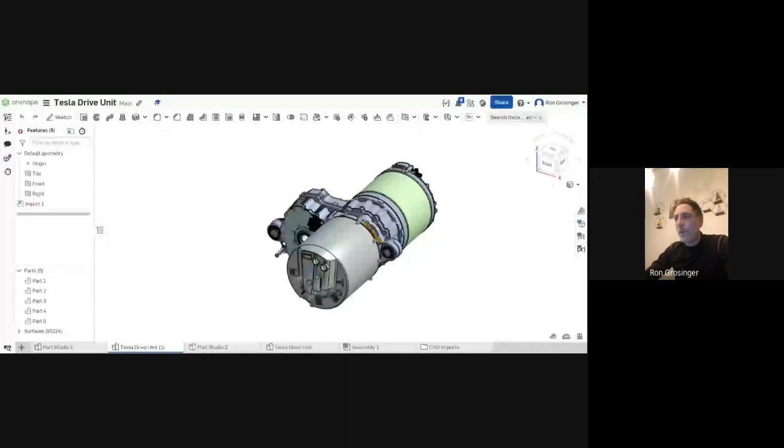We just exchange ideas. An idea we came across tonight was: can you get the CAD file of a Tesla drive unit? And if you do, can you 3D print it? Or can you get it made in foam, and then test fit your Tesla drive unit into the frame rails to see if it fits.

So we did a little experiment with the help of Richard from the EV Riders and Kevin, and we downloaded a Tesla drive unit. So Richard, what project are you going to use this for?

Well, it's all super secret sauce, but a small sports car, maybe something like a European Miata. We're looking to replace the rear differential with a Tesla drive unit, and it may be too big to fit, so we may have to cut the rails. It's a vehicle with independent rear suspension and a differential, with a drive shaft.

And the idea would be to get rid of the differential, put the Tesla drive unit in there, make custom drive shafts up. So the question is, will the drive unit fit inside that? That's the area everybody is thinking of doing this in, I guess.

You should know that last week on my other podcast, the Shop Class podcast, we interviewed Brandon from Amp Revolt, which is in Lancaster, Pennsylvania. He has a drive unit modification they sell you. They lock one side of the differential, and they sell you the drive shaft adapter, the yoke, and you turn the drive unit 90 degrees and go longitudinal. So that's one option - you use the space for the motor and transmission, which is more space, and leave the rear suspension all original.

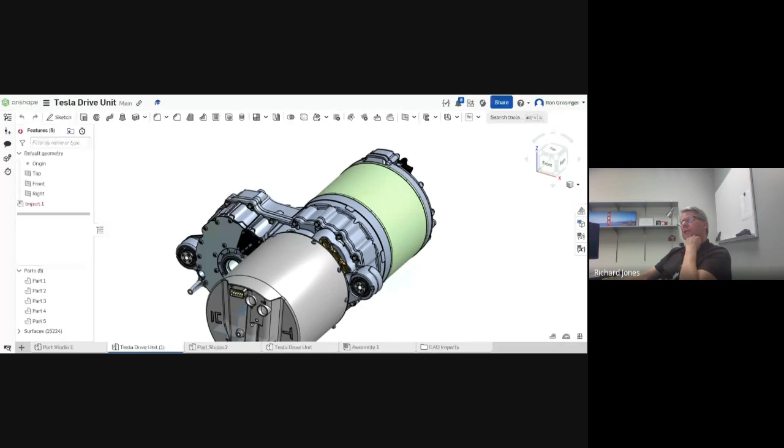Yeah, that's interesting. He's a really good dude, he taught with me for a while, so he's pretty knowledgeable. Here it is, I could show you what it looks like. It's an option, and the whole interview's on the Shop Class podcast.

Let's see, motor accessories - his website doesn't go straight to it, so he sells you this thing here. I think this is the drive shaft adapter kit, and I think he's got a video. Yeah, he's got a video. There you go, I don't know if you can see that.

It's underneath the vehicle, and this is really for heavy duty stuff, like if you have a really heavy duty 4-wheel drive, or a rear wheel drive with a large differential live axle, and you don't want to change it because you want to keep the integrity of that robust setup, like a delivery truck or something. Not that the drive unit can't do it, but you'd have to build some sort of suspension system for the half shafts. In this case, you don't have to change anything, so it's an option.

The advantage to what Richard's trying to do is take this thing, use the built-in differential - there's no additional losses - and take all the front space of this car, which is pretty small, and put batteries up there instead. Use where the engine and transmission is and stuff it with batteries, and use this Tesla drive unit, which has a differential built into it, in the back. But this is a way to go too, in the case where you want to preserve the original drivetrain - a good reason for that is 4-wheel drive, because then you put this right into the transfer case and you've maintained your 4-wheel drive.

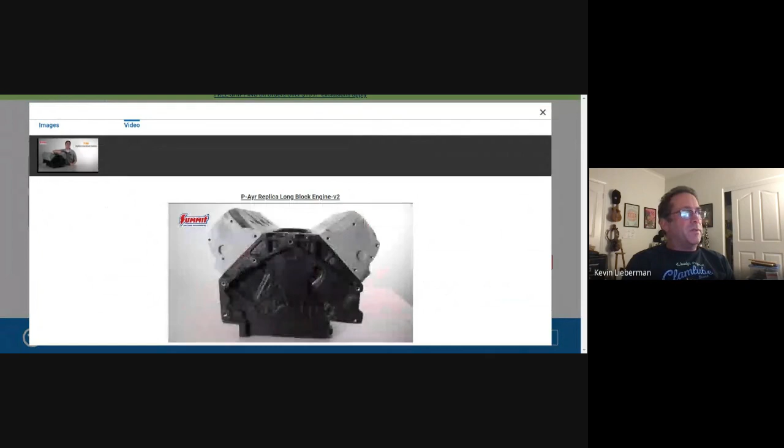Because when you're trying to fit these in a car and see if you have enough space, you're off by an inch or two. You're trying to route exhaust pipes and things like that. It's way easier to do with a 20-pound plastic engine than a 600-pound iron engine. You got to keep pulling this thing in and out to clear the frame members, and route exhaust way easier with something light and easy. Same deal with the EV stuff.

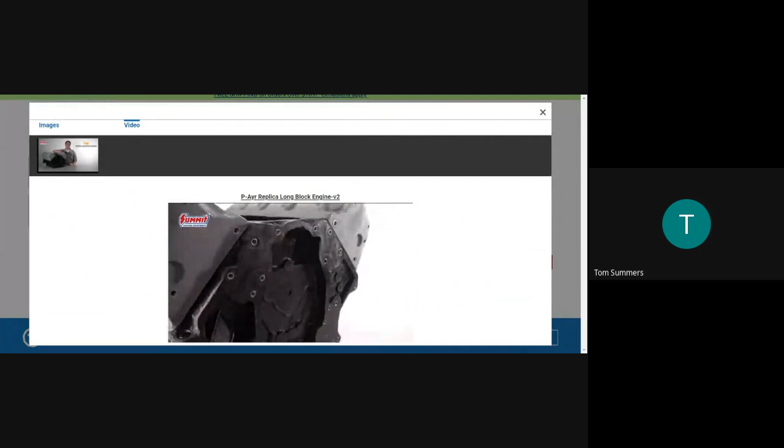Gentlemen, yeah, go ahead. We could do this with two-part foam. Have you guys ever worked with two-part foam? Make a mold. We could make a mold at EV West with their Tesla Model 3 drive unit, and then cast our own foam model.

Perfect, that stuff is easy to work with. Making the mold is going to be a little tricky, but you can use vacuum forming. Is that what it's called? Oh yeah, vacuum forming would be pretty good to make the mold. Just make it in halves. They do it in halves. You just make up a little box.

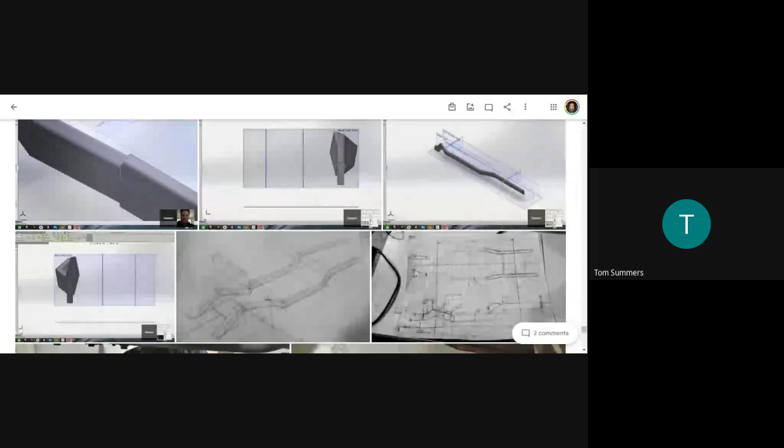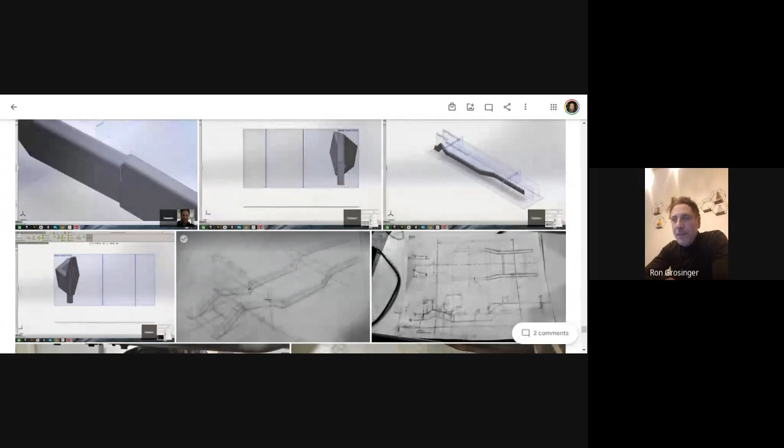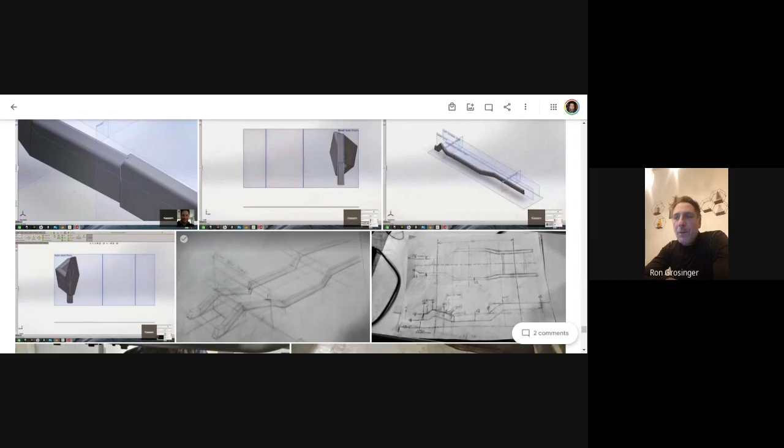Yeah, I agree. And maybe that could be done at the EVLC as a project layout class—like how do you size the parts for your project. That would be a pretty good class, because that goes into metal fabrication, engineering, and mechanics. And Sarah's not that far—she's in California, and Kevin's close by, and so is Talik, and so is Richard. Maybe this is something we could do. And Tom, if you know how to do it, we could all work together.

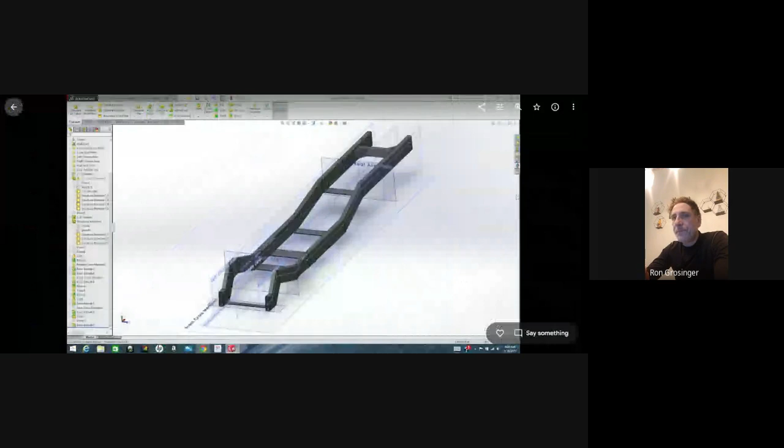Here's an example that I had to deal with when I was working on a Chevy K2500. What we did was we mocked it up in CAD, just like what you're talking about. This is the kids mocking it up. This one's not quite right, but the drawing is there with all the measurements. We had to take our measurements.

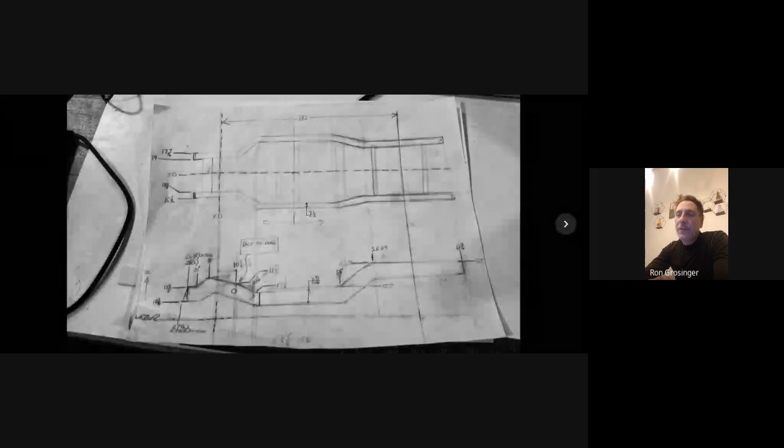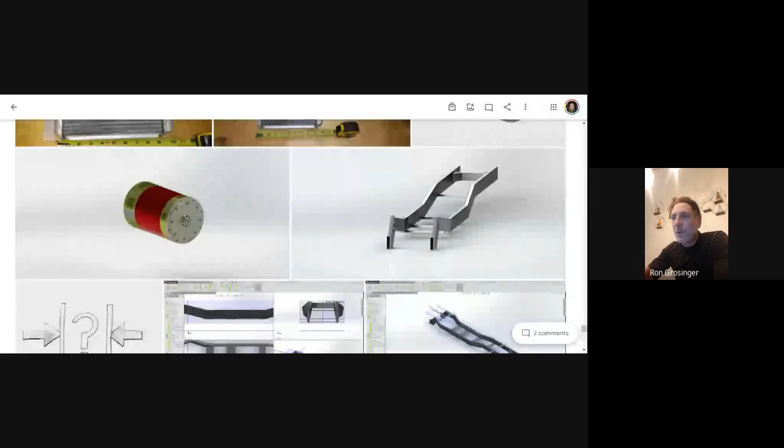And so yeah, like the fitting, the layout—some people call this engineering packaging. Like, where are you going to put everything, basically. It's not easy. And that's not something we cover in EV 101. That would be really good, actually. So I agree with that. That's a pretty cool one. And then it's a place where a lot of people get stuck—you bought the parts, now you're trying to fit them in your little car. How do you do it?

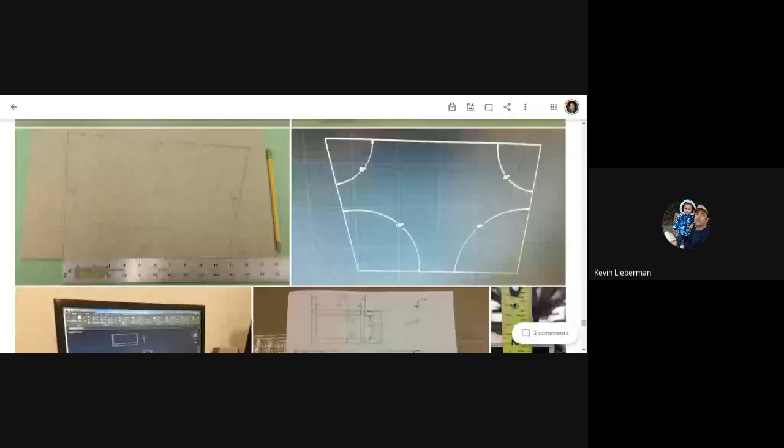And you get tired of pulling motors in and out trying to fit things in. I'm getting tired of pulling batteries in and out. Same thing could be done with batteries—these batteries are big and heavy and bulky, and I'm trying to get them to fit in my frame. Polystyrene models would be cool.

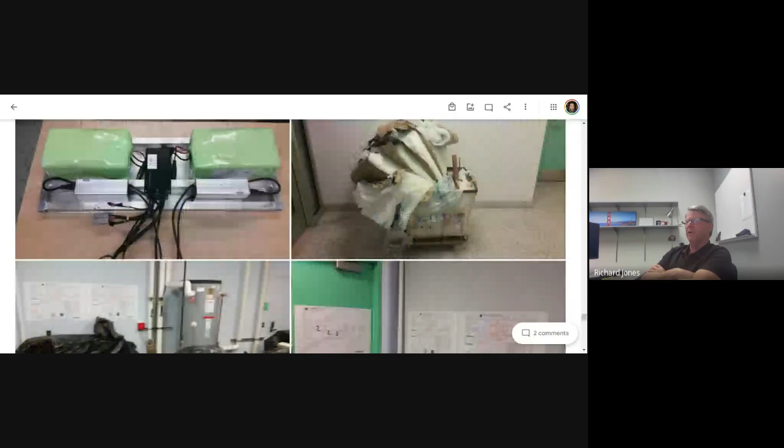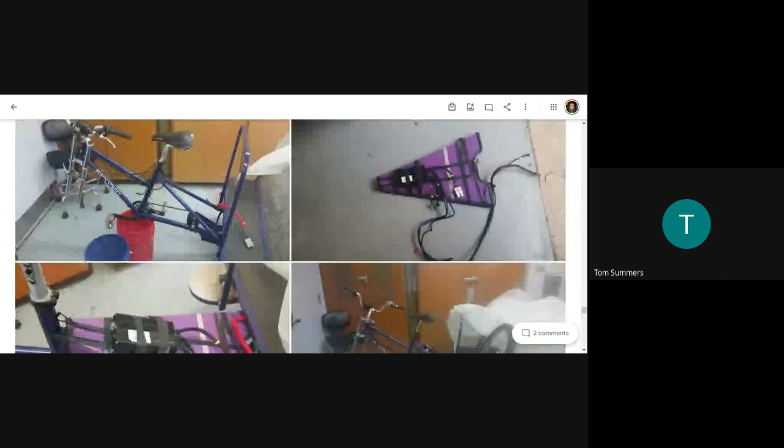Yeah, we do that a lot on boats, we make mock-ups. And by the way, Victron had those battery dummies we talked about last week. They have dummies, oh that's right, they had. Yeah of course, because they're heavy, so they had mock-ups for you. And this is very common in the boat world.

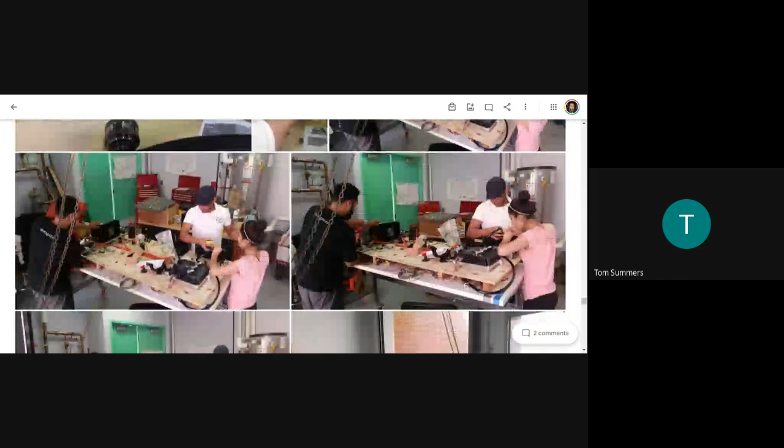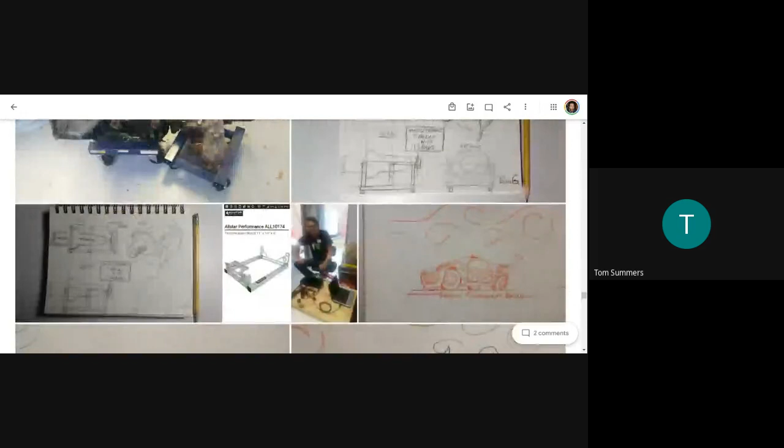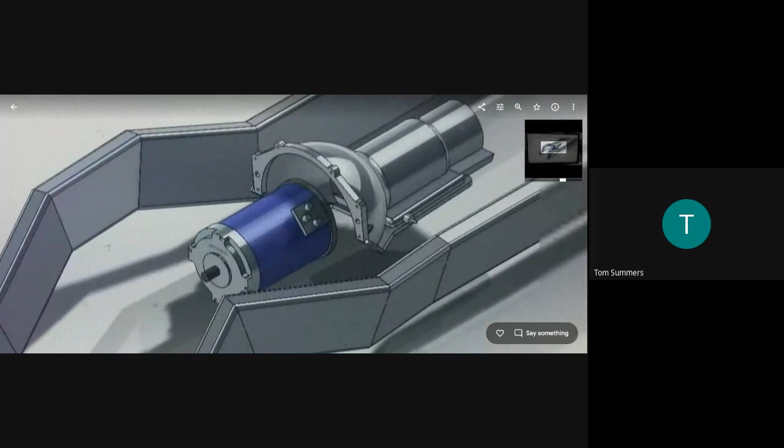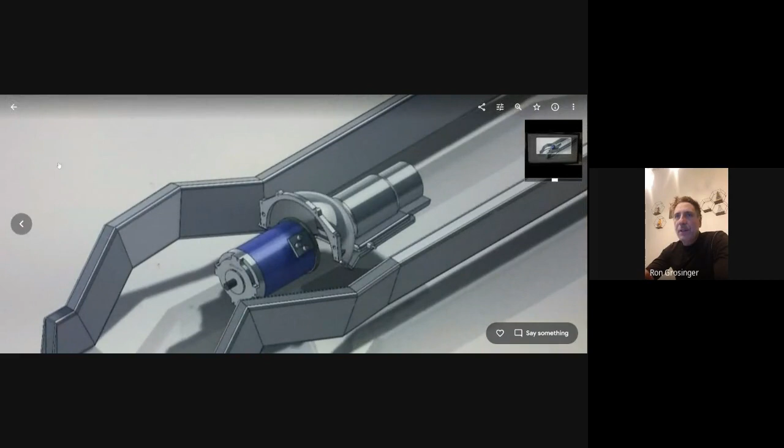It's the same thing with automobiles—nothing is plumb and square. You've got all these weird shapes, and you got to make some cardboard mock-ups with Scotch tape and scissors and all that good stuff, just to fit stuff into compound curve shapes. So mocking up is something we do a lot of. I agree, and then showing some in basic CAD, but also hands-on skills—so you might not always have access to CAD or want to work in CAD, so you might want to mock it up just in cardboard.

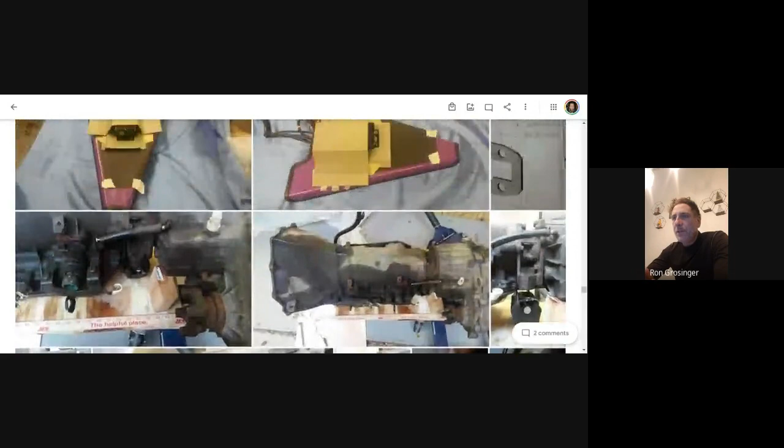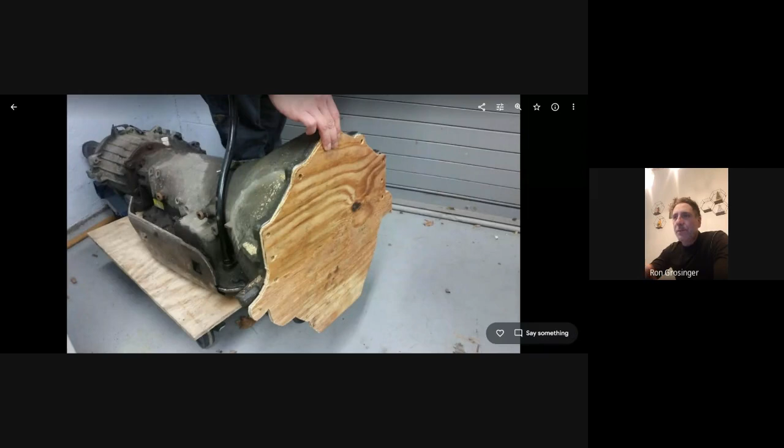I'm looking through my photos for a mock-up engine. Pretty cool topic. Even the adapter plate, if you don't have one, you can just mock it up in plywood if you had to.

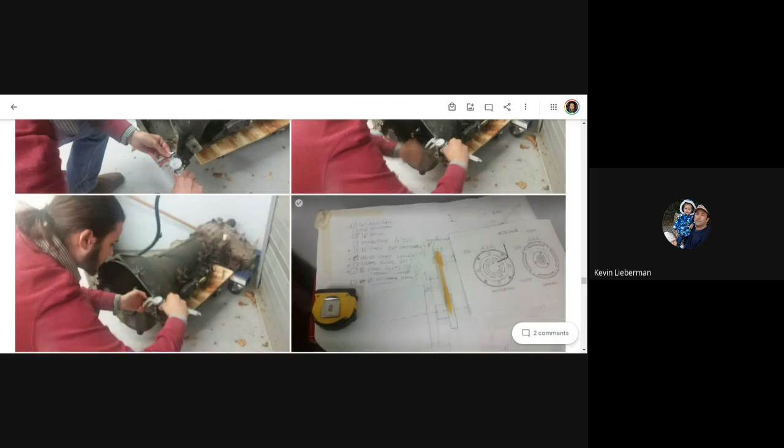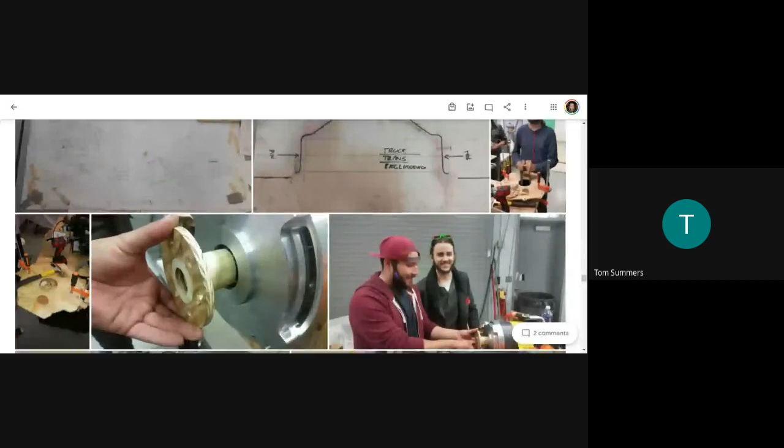And then there's services like Send Cut Send, where you send them the CAD model and they send you back the thing made out of metal, exact, with all the holes drilled. And don't forget, we have that machine at Michael's that does the bell housings and sends out the PDF file for it to be turned out on a lathe or whatever. So we're already doing this.

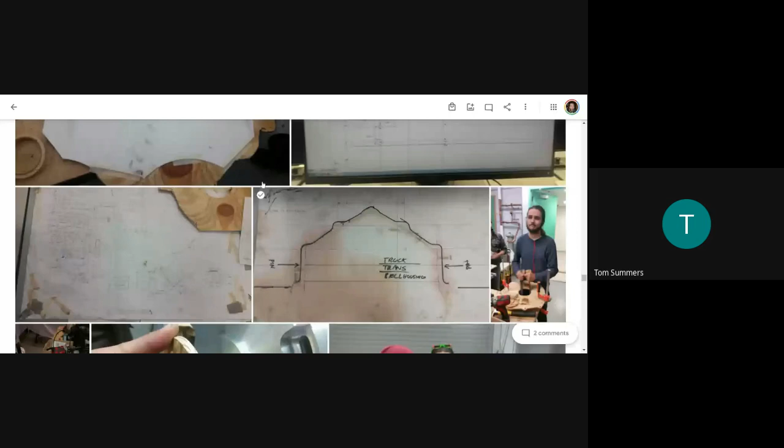Yeah, we just don't serve the mock-up side of it. If your company, they go straight to the end product.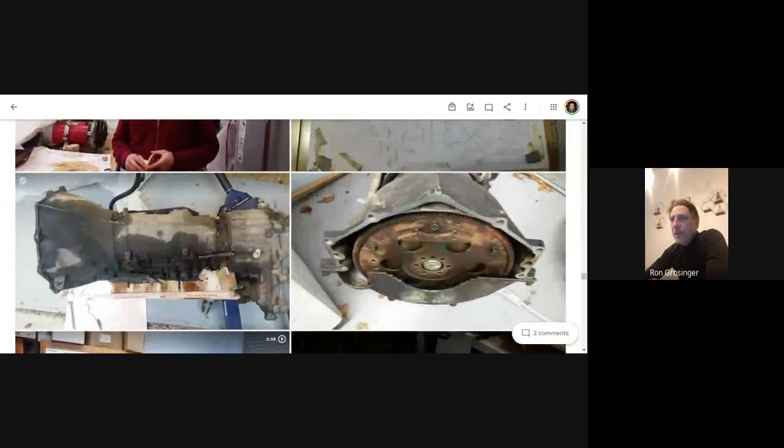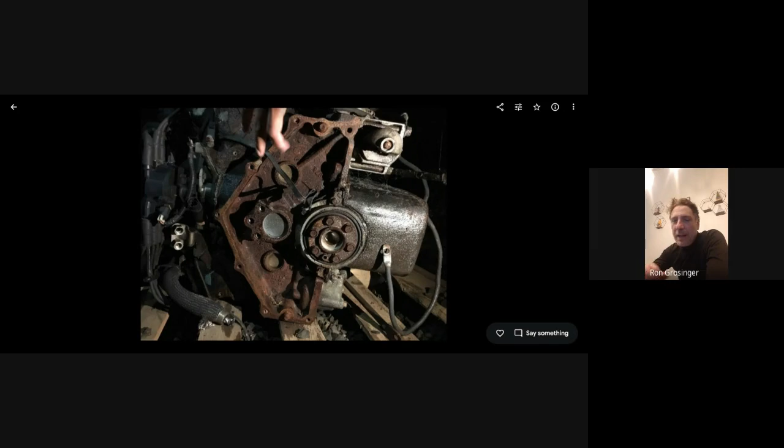Actually, I'll tell you something funny. Clearly you're going to buy a coupler if you had, let's say, the Net Gain or AC50, but believe it or not, one of my students came up with an idea. Do you guys see this photo? This is a very important photo. This is the end of the engine, the back by the transmission, where the transmission meets up. Notice something - that looks like the end of a coupler.

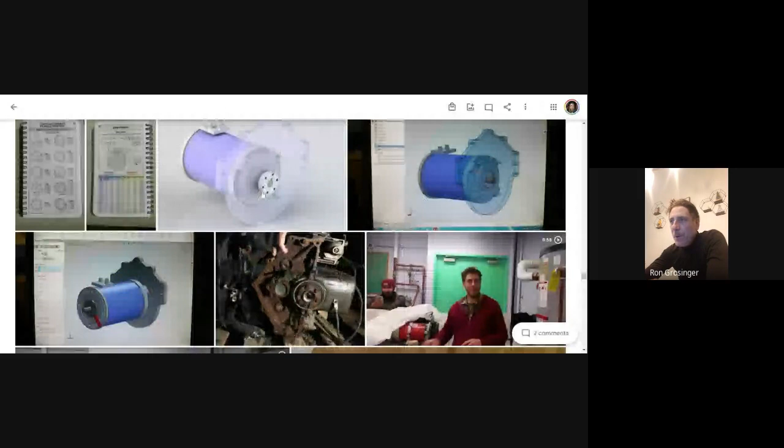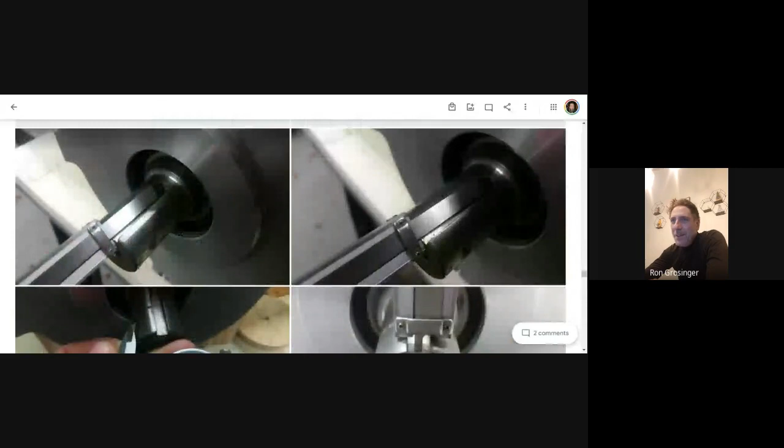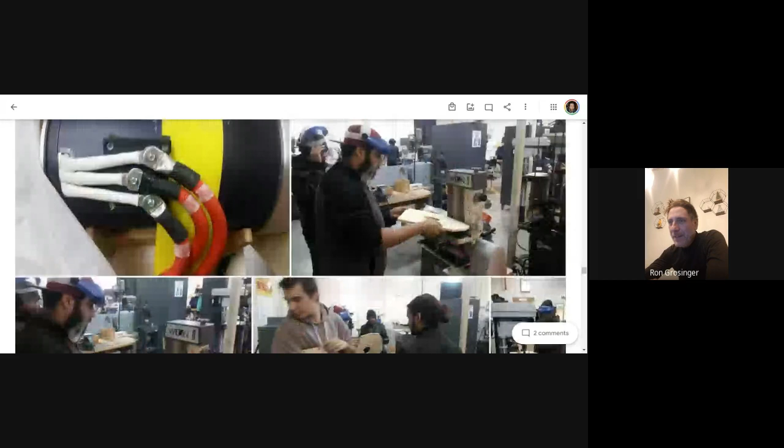What we realize is all you have to do is take the drive shaft out of the engine and cut off the end of the crankshaft. I'm going to show you a photo of that. The end of the crankshaft is a coupler. All you got to do is put it on a lathe. Here's the mock-up in a 3D printed example.

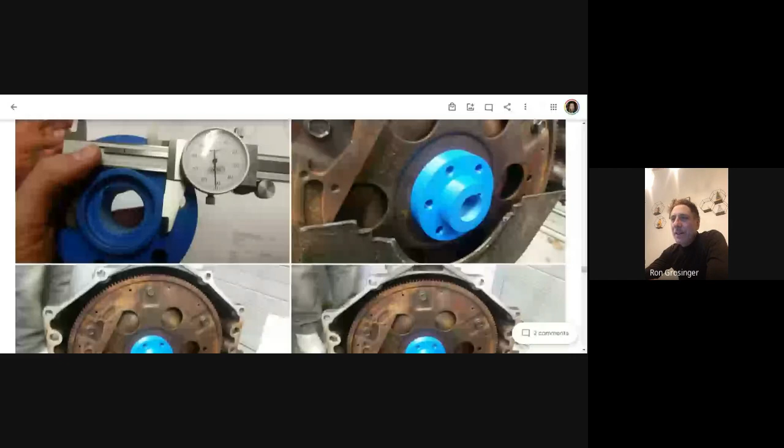And I couldn't believe it, but of course you're going to buy the coupler, right? Because Canadian Electric Vehicle, they have them available, but here's like a mock-up of our 3D printed one, and that's not going to last, obviously. But we then went and cut the end off the crankshaft. It's a bit extreme, but the idea is you have all the resources you need on the old vehicle - that's got a lot of dimensions. You might want to take note of those dimensions before you tear apart the car and stuff like that.

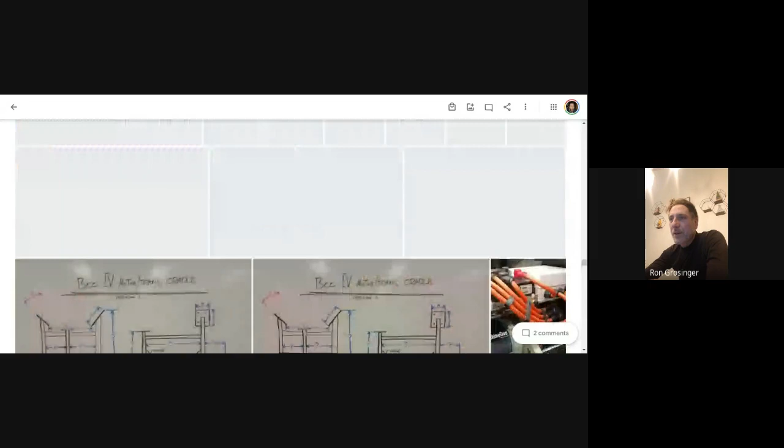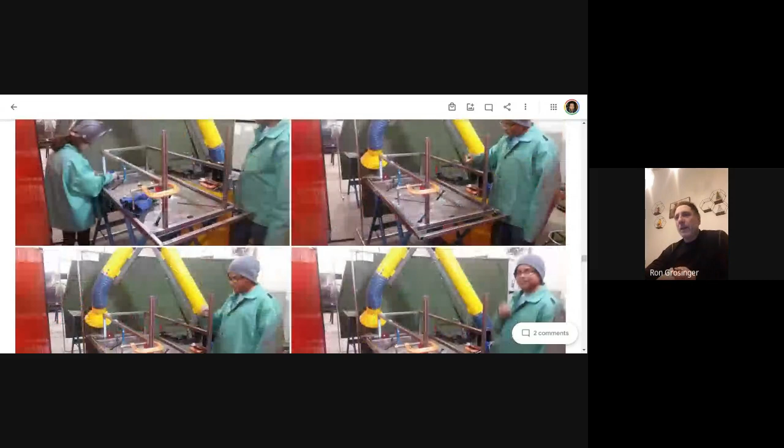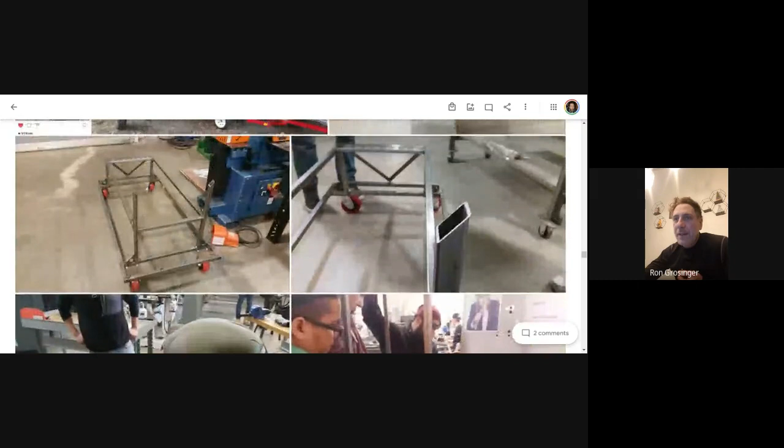So these are some of the things we come across when doing these mock-ups. Actually, we got crazy - we were at a college and didn't have time. If you're working in 2 locations at once, we made an engine stand for the whole thing. So this was our CAD drawing, but we put the motor and the trans on a stand because the truck was not available at the time.

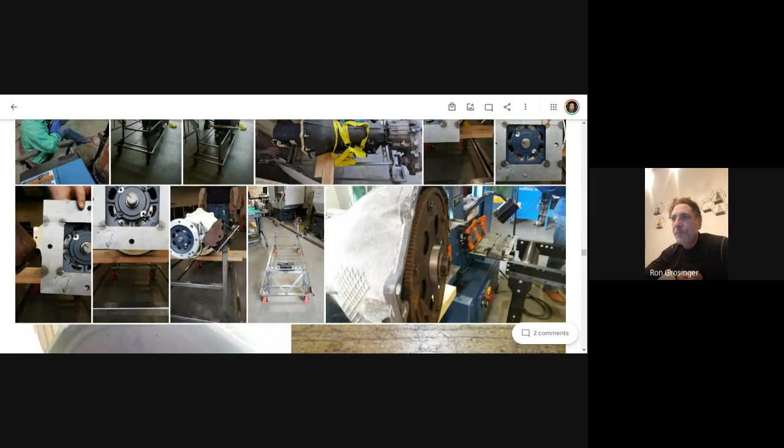And so that's an option.

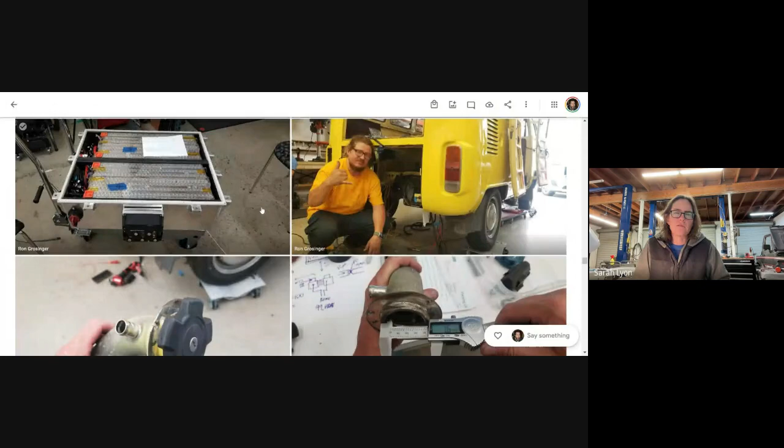Luckily, I have all these. I've done all this on the bench. None of it's in the car.

Would you like to see? Sure, you're about to see our delta here. We had quite the spread on it. I'm trying to find the video, Tollak. Do you know where the video is? Because it shows us charging and then the BMS shut it off. Kevin had a video. Oh yeah, that's right, he has it on his channel. Yeah, I don't know if it's unlisted, but he put that on YouTube to send to the class the next day. Okay, I'm gonna try and find it.

Oh, Kevin's huge resistor, is that what you're talking about? Well, there's two different things going on. Yes, there is a resistor setup, I think Richard's talking about, that's at the EVLC now. Maybe they have two of them, but that's for discharging. And you should not do this without the BMS hooked up, so just keep that thing connected.

But what we did was we charged in the summer because we were having issues where the voltage was strange. There was a runaway a little bit, and the voltages were creeping apart from each other. And then when we went to charge, the BMS shut it down within a minute. So then when we went to go look at these cells, nothing looked damaged. But that's the scary part.

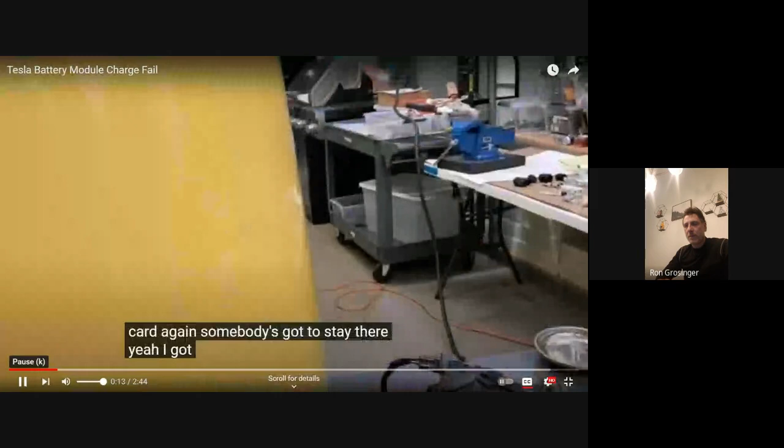Now we're going to turn the charger back on. This is happening at higher currents. Specifically, you slapped it? I'll wait till you get in, right? No, slap it. What's wrong with me? And that's just setting up the charger on the wall. But here we're going to get to the PuTTY terminal in a minute here. Get in the bottom first. Okay, not happening, you need to push it in.

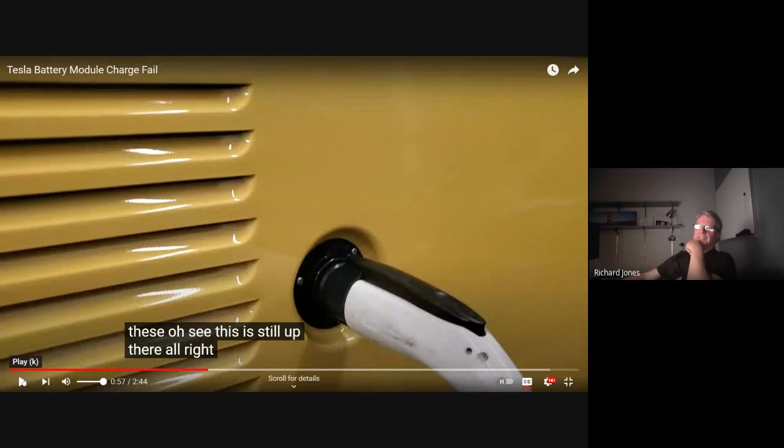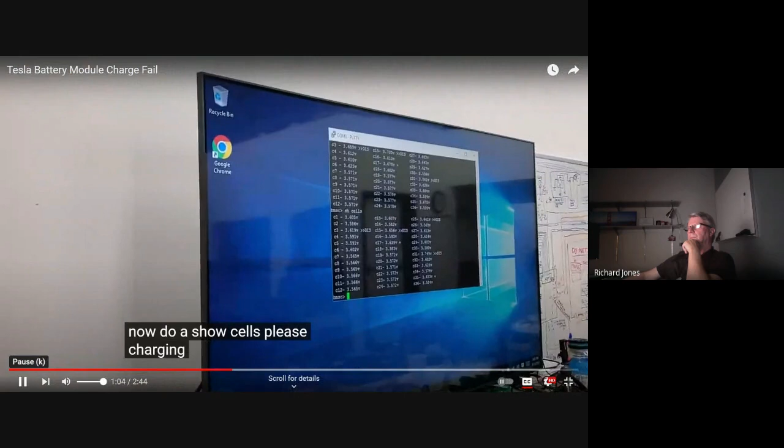Now it says cell 30. Okay, cell 31, 3.75. You guys see that? That's bad news, look at all the other cells. Are these really bad cells? These are LiPo, right? Not. This is a Tesla module, and they were bad. These are Model S 18650s. Model S, yep. So fully charged they are 4.2 or 4.1, right?

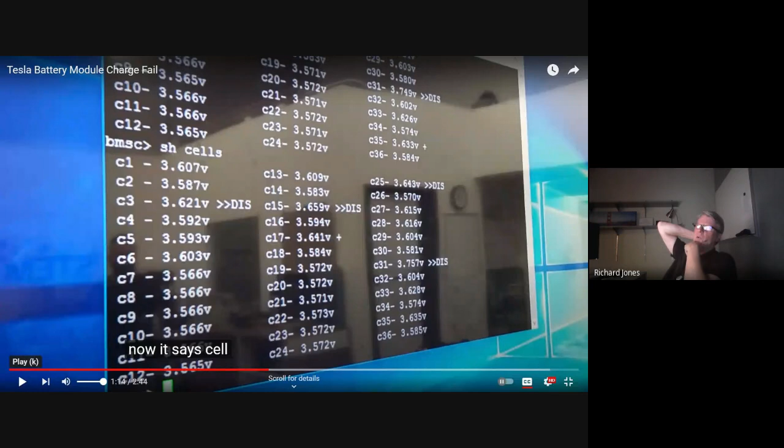No, you didn't finish charging them. I'm just showing you how fast this happens. Watch the refresh, it's going to be at like 3.8, 3.9, boom, and then it shuts off the charger. So here we go, all the rest of them stay kind of nominal.

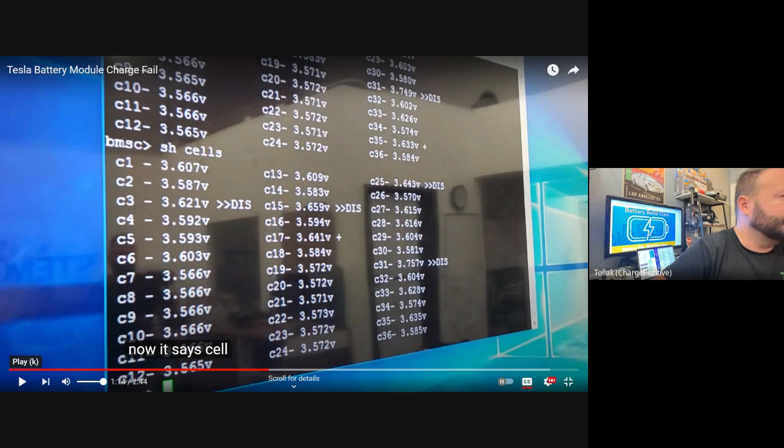So that cell 31, that could be a bad cell, or it could just be a cell that is being discharged. Do it show again please. What's that? That could be a bad cell, most likely, but it could also just be that the cell was discharged separately to all the others, and so it's getting close to being full before all the others do. See what I mean?

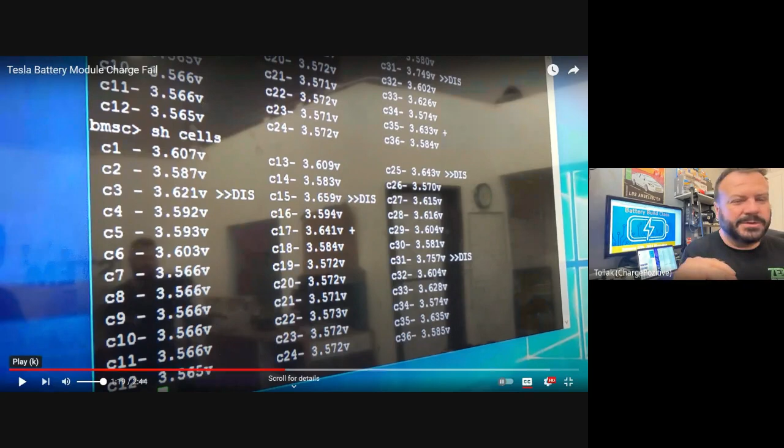Discharged? I mean, it went from 3.6 all the way up to 4.2 in a half a minute. Yeah, they started in a similar voltage range, but then it accelerated faster than the other ones.

Yeah, well, in this case that probably is a bad cell. It's basically showing that it's full before all the others were. And if it was exposed to the same energy draw, and it's being charged and discharged with everybody else, and suddenly it's behaving differently, well then that's a bad cell. But in Sarah's case, we haven't got a characterized pack yet. We've just got these modules that all came out of the same car.

After charging them, you have one cell that causes the charger to stop. That's always the case, and they're all looking about the same. So really the thing to do is to actually do a capacity check to characterize what kind of pack you have.

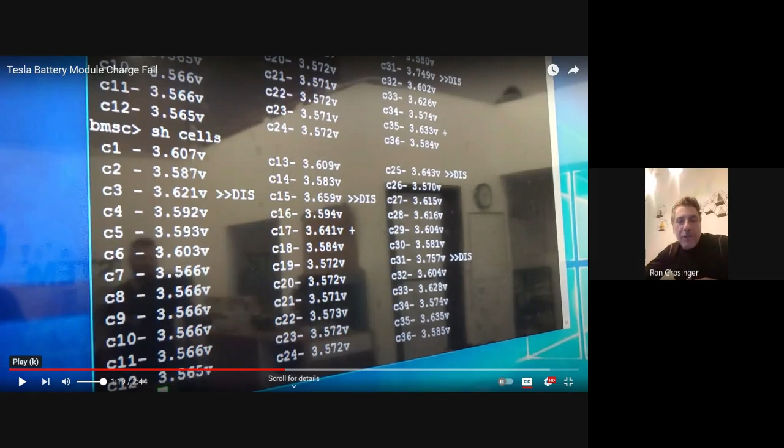100%, Richard, you're 100% right. I was just showing Sarah a nightmare scenario going from around 3.6 all the way to 4.2, shutting off the charger in a half a minute. And we already installed the pack in the truck. And this was also after trying to trickle charge, this was like after trying to set it on the BMS overnight, right? This was after...

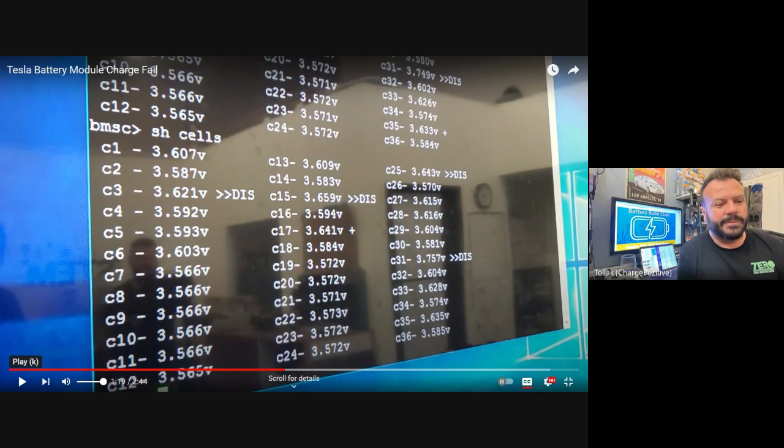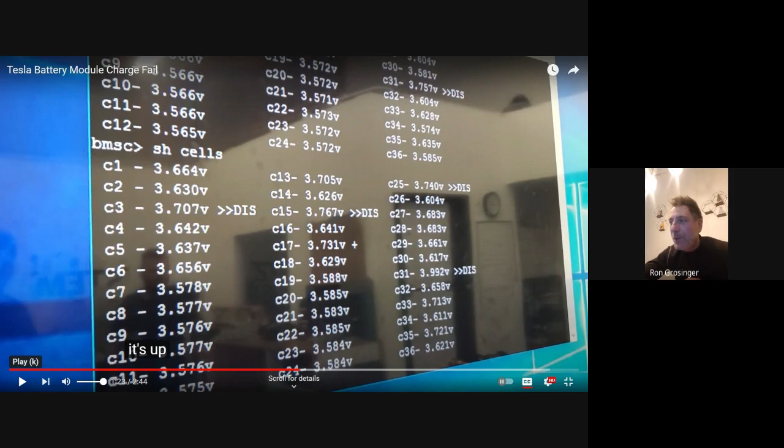...balancing it in parallel on the bench and then trickle charging it to get closer over a couple of days. This was after a lot of work, in and out, swapping, you know. So here, watch this happen, ready, here we go. It's up to... there, look at the refresh. I don't know if you could see that. That cell 31 is up to 3.99, 3.992, and the rest of the cells are in the 3.6, 3.7 area, and some at 3.5.

Now, had you characterized this pack before you did all this, or is this the first time you're really trying to work it? That's the magic question right there for Sarah. Yeah, honestly, this is what I advise people: you get a set from a supplier, they really should be stress tested. I think voltage is not an indication of the health of the pack.

Would you agree with that, Richard? No, for sure, that's a rough indication of how charged you are. You're either in the no man's land, you know, between 20% and 80%. It's only when it's starting to go up or it's starting to go down that you know that you're nearly full or you're nearly empty. But if this pack started with everybody nearly full, and then you drove it around a little while, and then you went to charge it up again, and this cell's behaving like that, that's clearly a bad cell.

Right, if you hadn't taken them all the way down. This is how we received them. Yeah, also we didn't have the time with the project to try to take apart the module and test each...

You have to basically treat a module as the replaceable unit. But individual cells within a module can be bad, right? Especially if it's come from a wrecked car or you don't know what's happened to it. But yeah, if you find a bad cell in a module, there's not much you can do about it other than replace the entire module. Right, because they're kind of like glued in.

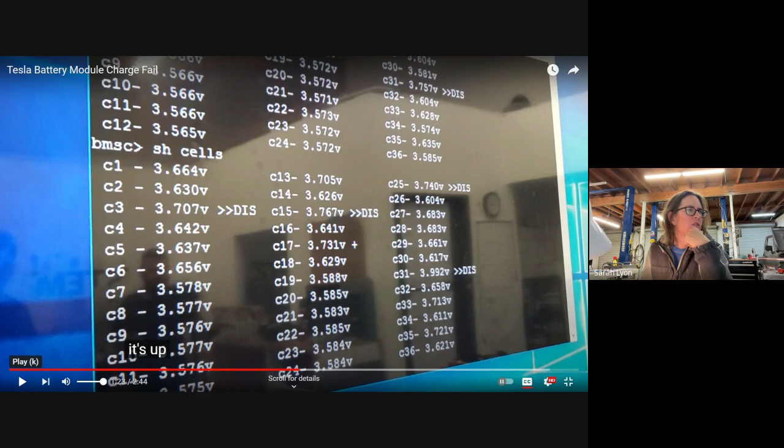Yeah, I wish I could show you my screenshot of the history, because it shows the watt hours and the voltage and the current. Just to reiterate what Richard's saying, I'm not saying you have a bad module. I'm just showing you what happened to us last summer.

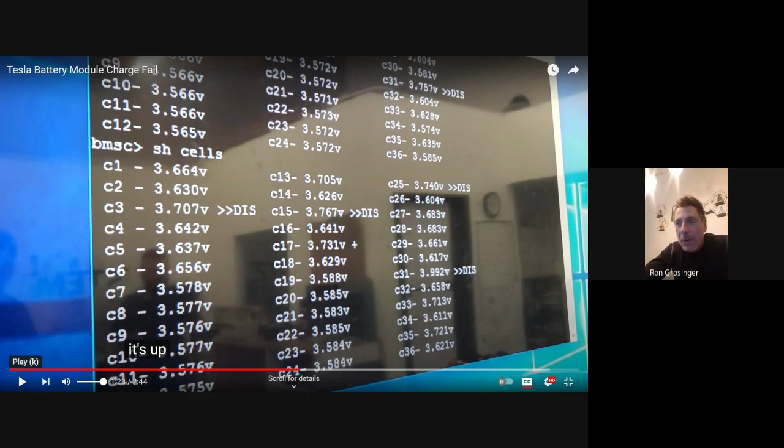And I learned my lesson that you really do need to know the capacity, or at least discharge it partially or charge it a bit and just see how they act. Voltage is not going to be a good indicator. And if you watch the last 30 seconds of this video, you'll see it rises up to 4.2 and shuts off the charger. So here we go.

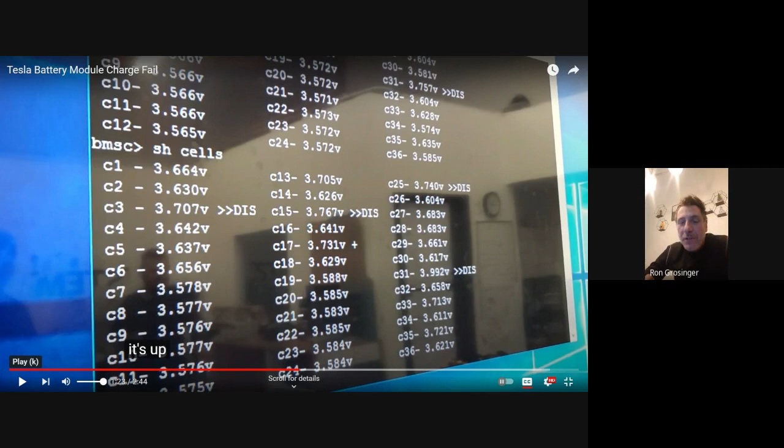So the only way to... 3.992. Oh, go ahead, sorry. To refresh it, it won't show it in real time. Is there no way to show it continuously? No, you have to refresh it. I forget the command, Richard probably knows it. Yeah, with that screen, you have to keep typing it in.

Or you may be able to get your terminal server, whether it's PuTTY or something like that, to repeatedly send the show cells command if you're using that screen. But if you do what Kevin's done and you've got some coding chops and a CAN bus, like Kevin is constantly reading these cell voltages and displaying them on a screen. So this is just the simple tool that comes with the Dilithium BMS. But with just this, if you automate the show cells command to send every couple of seconds, that might be good enough.

But certainly when you're first charging your new pack, it is a good idea to keep an eye on this, because what you're doing is characterizing the pack. You're figuring out which are these modules, what's the capacity, are they good?

And if your supplier actually gave you a report that tells you what the capacity was, that they did a capacity check themselves, that's great. But I'm not sure that every supplier out there does that. And even if they do provide you with a report, how much do you trust it? Probably quite a bit, if it's a good vendor. But you probably want to do your own test, because you don't know what's happened to the cells in the meantime. Someone could have dropped a wrench across the terminals. These things happen, especially in our amateur world.

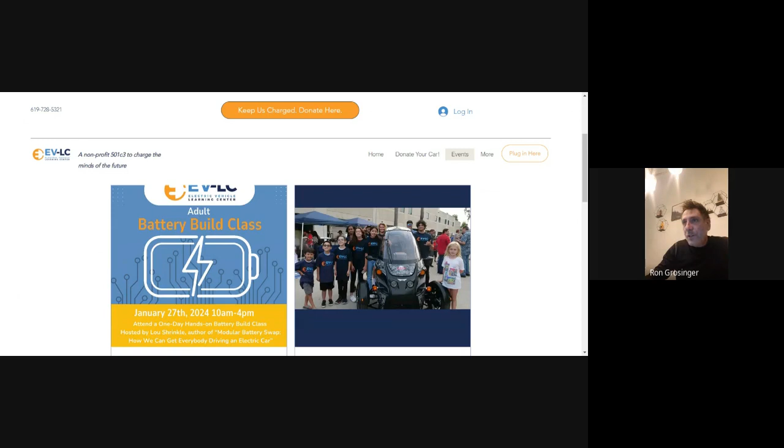You know, it's very cool, Richard. At the design stage, before you've even chosen what drive unit to use in your vehicle, will it fit? You know, how big of a hammer do you need to make it fit? Yeah, exactly. Don't be afraid to reach out if you want me to.

I'll try and put it in the chat before we leave. I could show you the basics of CAD. Not that you're gonna make your own motors or anything, but it's a good skill to have, and I think a man of your capacity could absolutely learn this pretty quickly. That goes for anyone. Honestly, I teach this to high school kids and they pick it up super quick. So I think you could do it.

Okay, cool. Yeah, it's a matter of putting the time in and learning the terminology. And I'm still writing code in C for an ECU for another EV project here in San Diego, trying to fix bugs in the C code. Wow, so that's what I know.

Yeah, and also Tom is here. Tom, I don't know if he's still listening, but thanks for coming in. I know we kind of went off on the thing about all these different batteries. Are you still there? Yeah, no, this is very stimulating. I actually kept you on the whole time.

I stopped at the post office to check my mail, and I also went to the auto parts store and got a car cover. Yeah, you kept me company.

I really appreciate the question from Richard and also Sarah, and I'm so glad you threw in Jehu, because he stresses bottom balancing. He's a distributor of batteries but also a recipient of large shipments, and whenever he gets a shipment, he demonstrates capacity and bottom balancing, taking it back up to the top before he ships. He doesn't do that to every battery, but he does it to selected samples from each shipment, so you have a general idea of what capacity is going to be.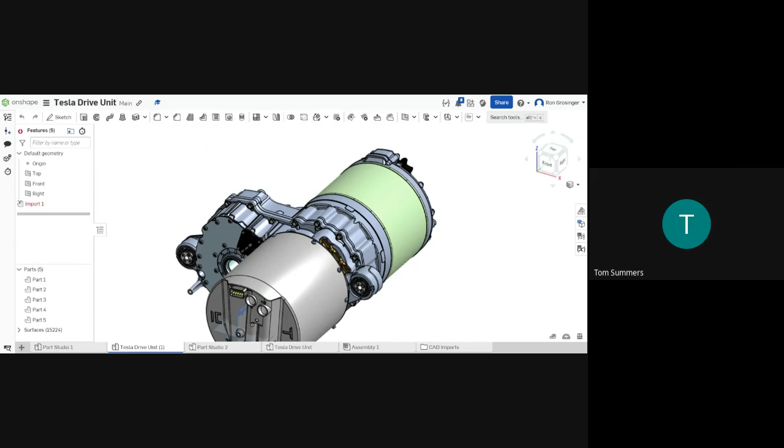No, and it's all good because they look exactly the same, you know? Yeah, yeah. But that's the thing, not that you have to check everything, but if you got a critical project, then yeah, I would.

And honestly, it didn't take much time. We charged it for literally a minute, and one of the cells went to the roof in less than a minute, and that really showed us something was going on.

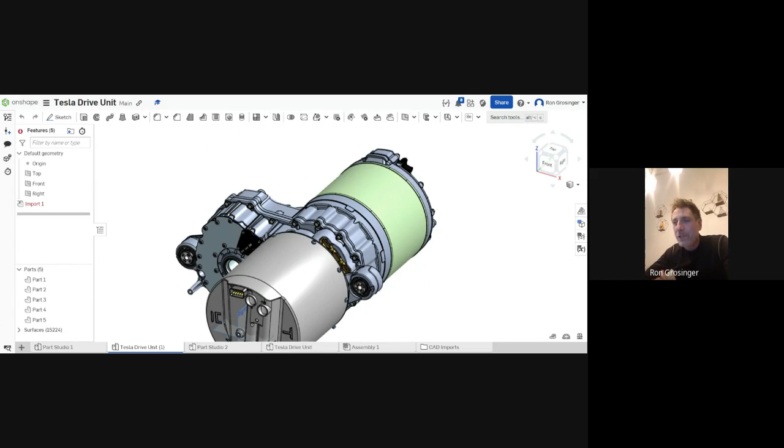Anyway, in the chat I put a really simple CAD lesson. I call it CAD lesson 1, Tony Stark's Cyber Donut. It's a little ridiculous because it's for high school kids, but you might find it fun, and it's really simple to get you started. So Richard, let me know if that jives with you, if it works.